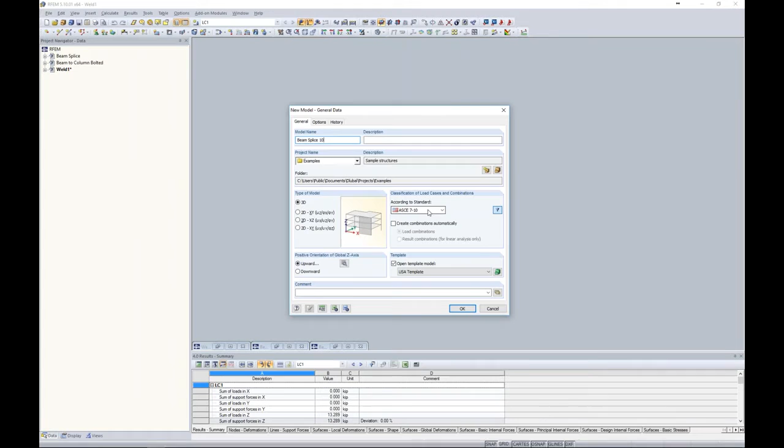So to begin with, we want to start off with a beam splice connection. And so I'm going to title this model Beam Splice 10. The type of model is 3D, and we can generate load combinations automatically here according to a specific standard. We're not so concerned with the load combinations and design today, so I'm just going to manually create a load case, and we'll just keep that pretty simplified. Once we click OK, then we can launch our new file, and up pops in the center here our graphic window.

We also have our tables to work with down at the bottom. What's nice about this is that you can import and export directly to and from Microsoft Excel if you prefer to work with Excel spreadsheets. We do have our tools to work with up here at the top. We will certainly be utilizing those today. And over on the left-hand side, we have our project navigator, which I think is a little bit more unique to our program. For example, the data tab, which we're currently looking at, this will provide us with all of our input data. You can see our long list of add-on modules is listed here as well, which we won't be getting into today.

The display tab is going to control everything that we're viewing graphically within this window over here. This includes our results as well. So typically if you want to turn on or off something, or maybe you'd like to change the color when you're looking at the results or how it's viewed, everything will be done within this display tab. Our views tab is where we can create user-defined views. And as we begin to generate this model, we'll also have some views that are generated by the program automatically as well. And finally, once we run an analysis, we will have a results tab available here.

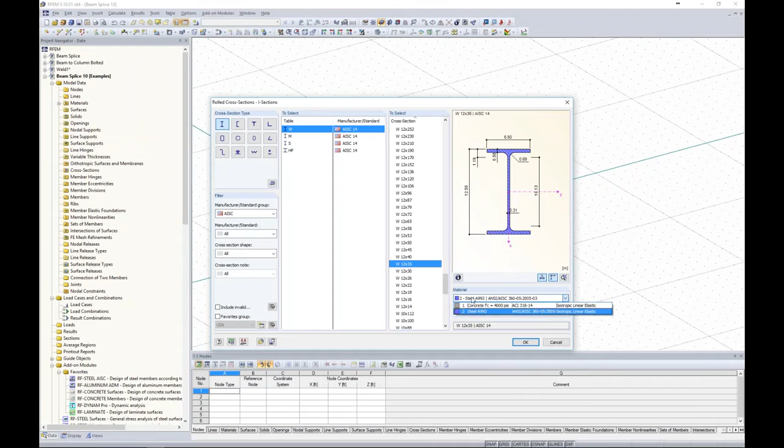So to begin with, we want to start off with a typical beam member for the first part of our splice connection. So I'm going to draw in a new member, and I will open up my cross-section database here. We have our rolled cross-sections. Once I launch this, I will see my AISC shapes listed here. I'm going to scroll down to utilize a W12x35. Now, steel A992 is one of the default materials within the program whenever we first create a new model, so we will just stick with this for now.

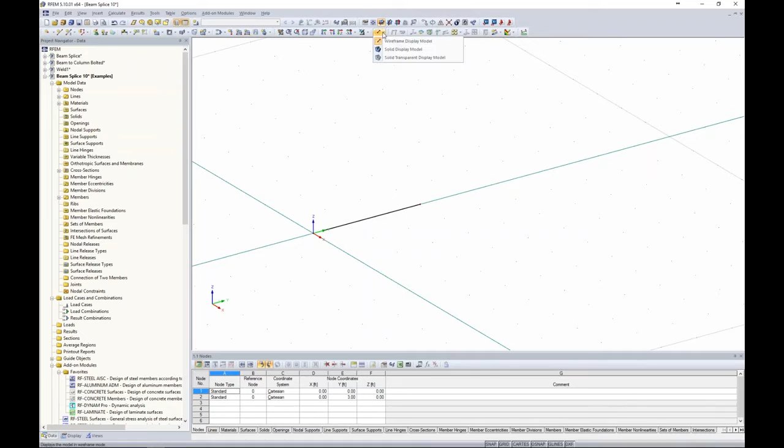And simply clicking on 2 points, one at 0, 0, 0, the other one at 0, 3, 0, we've created just a short beam segment here. Now, when I turn this into wireframe view, the thing to note is that members are 1D elements. So when we're taking a look at the wireframe view, it's just simply modeled by the center line. If we turn this back into a rendered view, of course, all of these cross-sectional properties will be taken into account for the analysis and design.

But if we're interested in something like the stresses on the flange versus the stresses on the web, you really can't view those different stresses on different components of the beam because it is being modeled by this simple center line here. Now, what we can do though is to right click on this member and we can utilize this option, generate surfaces from member.

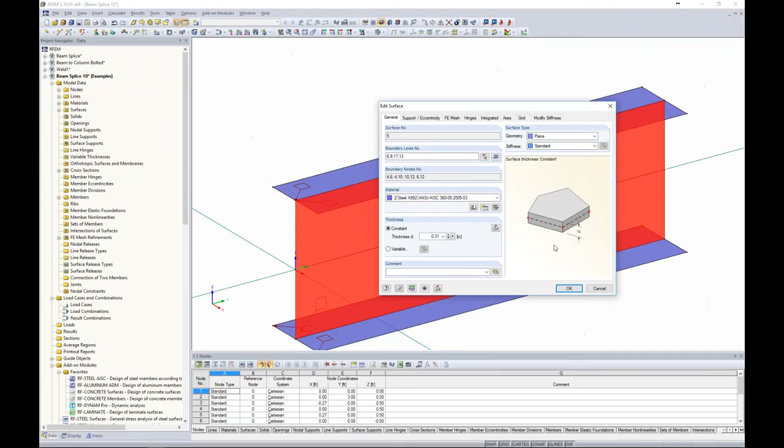So what I've done here is I've converted that 1D member element into 2D surface element. So we have a surface element now for our upper flange. We have a surface element for our web and even the lower flange. When I double click on the web here, you'll notice that steel A992 is still populated, and even the thicknesses are taken directly from that W12x35. So this is a very useful feature when we want to generate surface elements from those 1D member elements.

Now, the next thing to focus on would be our plate that maybe we're welding this W shape directly to. So I'm going to change around my drawing grid here, and we will snap to the front of the beam to change our origin, and we'll also change the plane here. Now, when I look at my drawing grid, the snap points are set at every foot. That's just default. So down at the bottom of the screen, when I right click on grid to edit it, you'll notice here that those grid point spacings are set at every 1 foot, as I just mentioned.

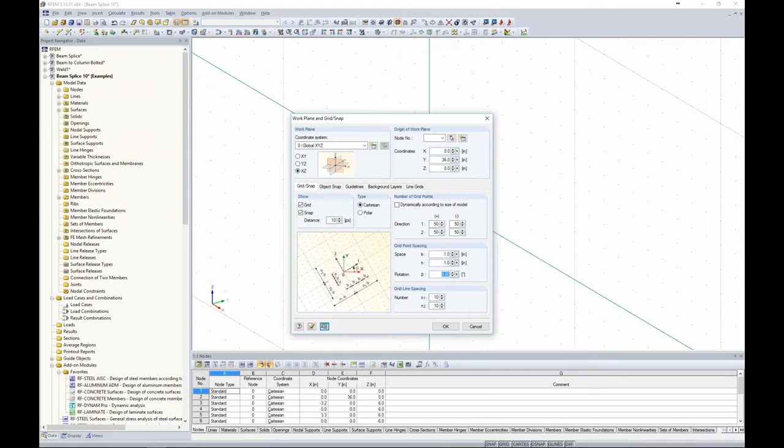We can open up our units options and automatically change this to inches instead. So now you can see that instead of 1 foot, I'm seeing 12 inches, and let's decrease this to every 1 inch. I click OK. So now you can see my drawing grid is much more useful when we're working on a much smaller scale, such as a connection. I'm going to orient the model here. So now we're looking at our W shape within the page, and we want to draw our plate element.

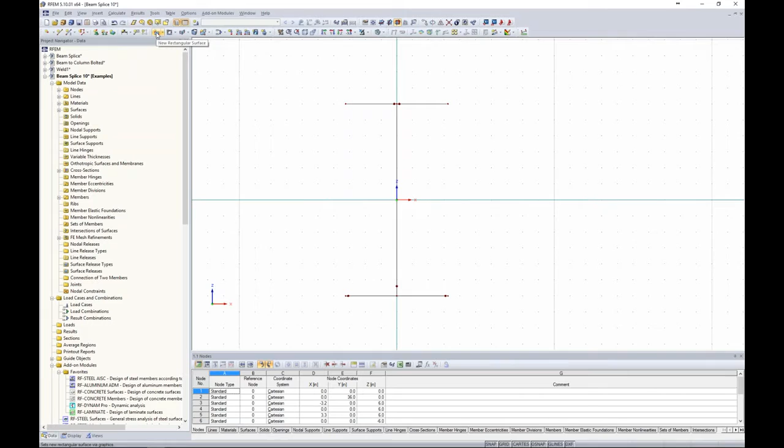I'm going to utilize this option, a new rectangular surface. So when I click this option, again, this is a surface element, just like what we saw when we converted our 1D element into our 2D surface elements. I want to create a new material here, and using my filters over on the left, I can filter to metal, to steel, to the ASTM, and you can see here we have our long list of ASTM materials. Now I can also utilize a favorites group. Favorites group is just where maybe I place a few of these materials, for example, what I'm using in today's webinar, that I can quickly have access to without having to sift through that long list.

So steel A36 will be the material we select here, which the material properties are populated down here at the bottom so that we can view those. The thickness, we'll set this as 0.25 inches. I click OK. So all I'm doing is just snapping from one corner to the other. And I turn this into an isolated view, just a surface element.

So the next thing that we would like to do is to place those openings for bolts. Up next to these surfaces, we also have the option for openings within surfaces. And you can see here we don't have just typical shapes like a rectangle, but we also have circles, parallelograms. You can even draw in your own polygon. So this is very efficient when you have some type of odd opening within a surface connection. It's really no problem to model that. For us, we will stick with a circular element though.

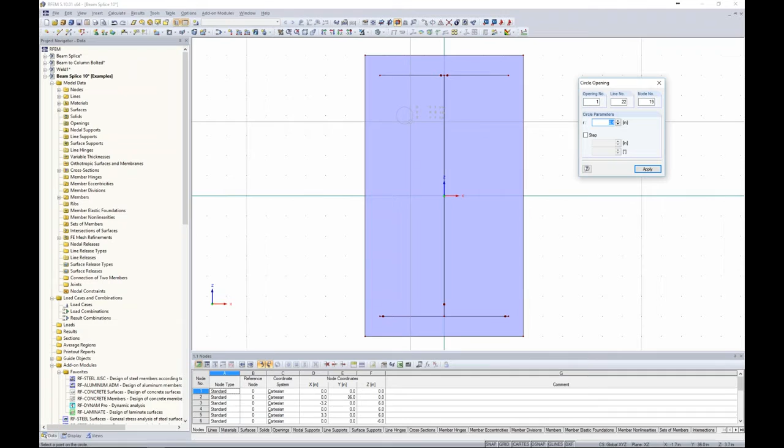So we just simply snap to the center line of that opening. And we can either snap to the radius of where we'd like to place that opening or type in 0.28 inches and click enter. So now that opening was automatically created within that plate element. So I'd like to do the same thing at the bottom here, and I just snap to the center point, type in 0.28 inches, and I have the two openings on the left-hand side.

Now, zooming in here to this opening, realistically, we're going to draw a plate right next to this one with an additional beam. This is a beam splice. And in order to hold the plates together, I want to draw some bolt members that are going to hold together those plates when they're in tension.

Now, those bolt members we'll get into in just a minute, but what they're going to do is to frame into right in the center of these openings. Now, they're 1D member elements, so the question is, how do we connect those 1D member bolts right here in the center to the rest of our plate surface? Well, the answer to that would be small little rigid links.

So what I can do is to right-click on this line, and I can create a node on the line and intermediate nodes. Maybe I select 3 here, I click OK. So now I have 4 nodes located along the line of this opening.

I go to draw in a new beam member, and this time the member type will be rigid. You'll notice that the cross section is automatically grayed out. That's because for a rigid link, the stiffness is set to an infinitely high number, a very, very high number. So the cross section is really irrelevant here. It's really treated as a coupling member.

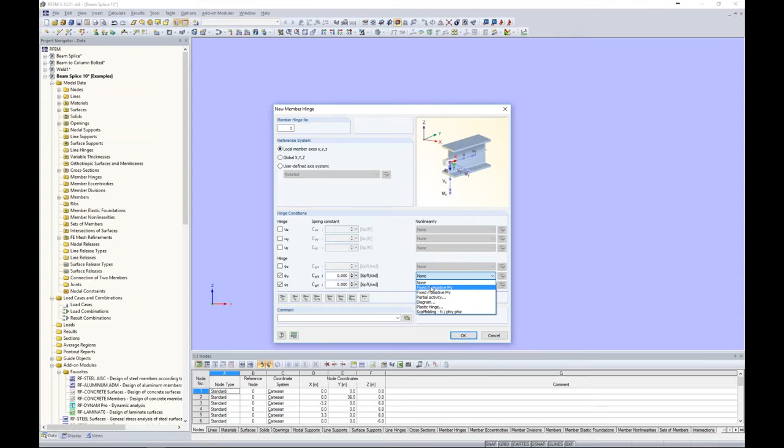And lastly, if you would like to get into nonlinearities for any of our 1D member elements, you can do so. So if we didn't have a full transfer of a moment, but maybe we had only moment transfer up until a certain value, well, you can set all of that with these options here. For our case, we will leave this as fully fixed.

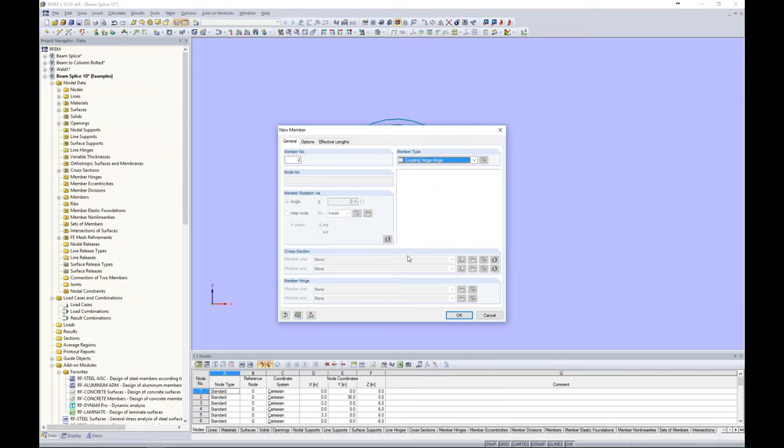Now, something else to point out is that we have quite a few other members down here called couplings. You'll notice that we have coupling rigid rigid, coupling rigid hinge. Well, when I select one of these, my member hinges are now grayed out. And that's just because these are some quick access tools to get to a rigid link with those member ends already defined. So for example, a hinge would automatically release the moment at either side. So same process, just a little bit quicker so that we don't manually have to define these member ends.

Now, a rigid type with the member hinge set as none means that it's fully fixed, and we can simply snap to the center line of this opening to those 4 nodes that I created. Now, in reality, you would maybe want to create several more rigid links here, but for example today, just keeping it simplified, 4 will be plenty.

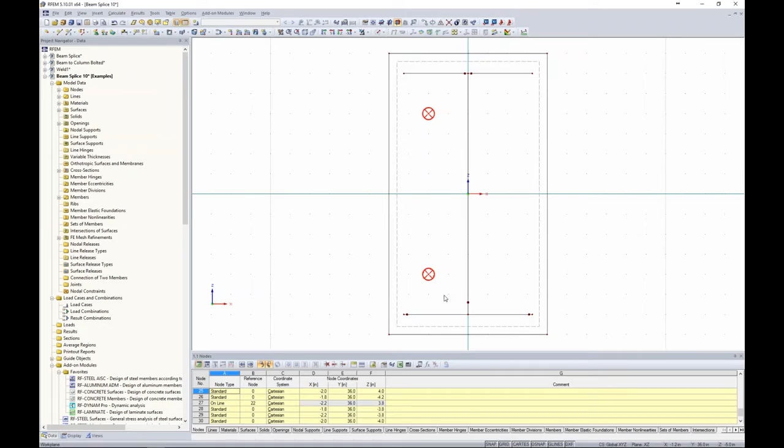So what we can do is to highlight those 4 rigid links, hold down our control button, and simply snap to our bottom opening to create the rigid links within the bottom there. So now that we're done with the 2 openings on the left, I can turn this into wireframe, select both of those openings, and once again, just making a quick copy, I hold down my control button and utilize the drag and drop feature to make the other 2 holes on the other side. And turning this back into wireframe or rendered view, we can see those openings there.

Okay, so moving on, we currently have our 1D plate or 2D plate element drawn here. What we'd like to do is to convert this into a contact solid. So the first thing that I would like to do is to right-click on this member, and we have this option to extrude the 2D surface into a 3D solid.

So here I can type in the height of the solid. Now this is important. If I have a 0.25 inch thick plate on the left-hand side and a 0.25 inch thick plate on the right-hand side, the height of my solid needs to be the sum of those 2 thicknesses. So in our case, this would be 0.5. Now in turn, if you had a 1/4 inch thick plate and a 1/2 inch thick plate, well then that would be 0.75. So you just want to add those 2 together to come up with the total height when we're looking at something like a contact solid.

The other thing to notice is that we do have the surface type selected here where the extruded surfaces will be set to null. So once I hit apply, let's take a look at what the program has done here.

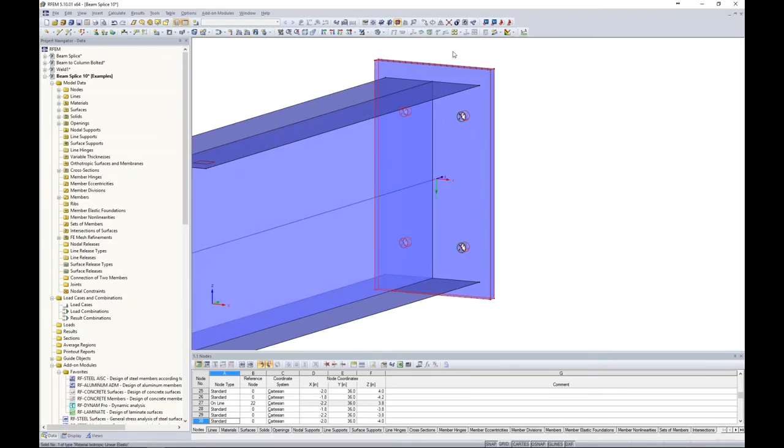It's created a solid element, so now we have a 3D element rather than a 2D element. We can see that those openings were carried through. That's all great, but when I'm looking at my surface elements, the solid is comprised of surface elements on every end.

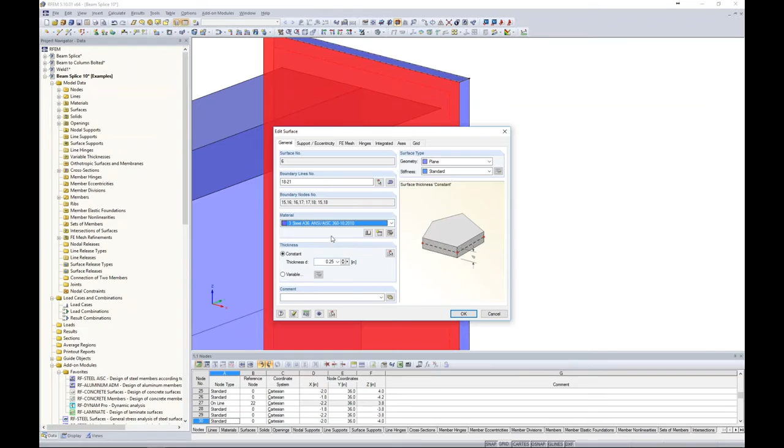And that plate that we just defined, if I double click on it, it was automatically set to null. So that's what that checkbox did when we extruded this into a solid. So we want to change this back to standard, and we've already defined steel A36 within the model. The thickness is remembered at 0.25, so I click OK.

Now the exact same process needs to be done on the back side of this solid. So selecting my back surface element here, we're going to change the stiffness to standard. Steel A36, 0.25, that's great.

But you'll notice that at the top, these narrow sides, I still have my surface elements here defined as null. So around these smaller edges, we're going to keep all of those with 0 stiffness.

So we currently take a look at this solid, and it's indicated - if we turn this into wireframe, it's probably a little bit easier to see - by this purple node right here in the middle. We can double click on it, and you'll see here the solid type is set to material. So this just means it's a typical 3D element within our finite element software.

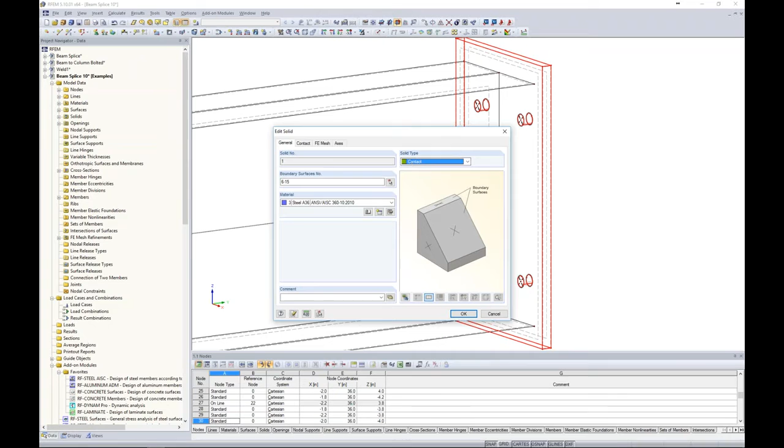What we would like to change this to is a contact solid. So we just utilize this drop-down box, and now we have a contact tab here. So I want to jump back to the PowerPoint to discuss a few recommendations and requirements for contact solids.

Now, this plays absolutely no influence in terms of the stiffness of our contact solid or anything of the sort. Lines and nodes are just simply meant to be used as modeling tools for surfaces, solid elements, and even members. What the program is doing internally is creating FE mesh elements in between those integrated objects. So to be clear to the program, we do need to have those same integrated objects on the top and the bottom.

So going back to RFEM then, what does this mean for us? Well, if we take a look back into the model, you'll notice that we have these line elements here, which are shown from framing our surface elements from our W shape. Maybe I want to take a look at here of just the plate elements, and we'll make a visibility here just based on these selected objects.

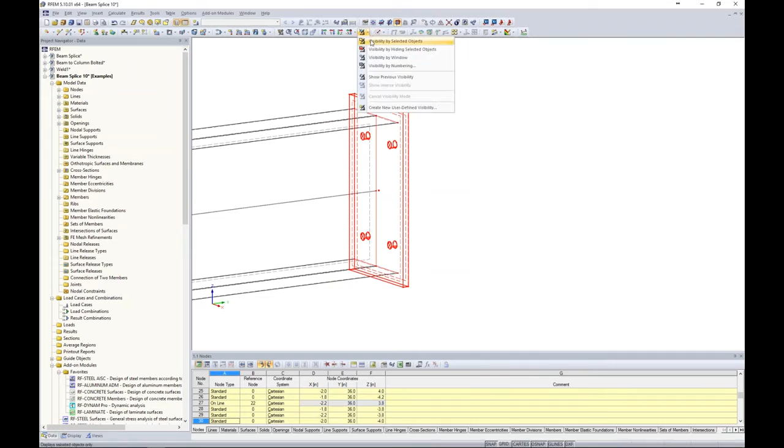So what I need to do is I actually need to copy these same exact elements to the back side of my surface. So I can do so by selecting them here, by highlighting, and I can hold down my control key. I even need to make a copy of that center node right there.

So taking all of these elements, then I can rotate this around, use my Move Copy tool, and I can make one copy in the global Y direction of 0.5 inches, and I click OK. So now you can see those lines and nodes are identical on each surface.

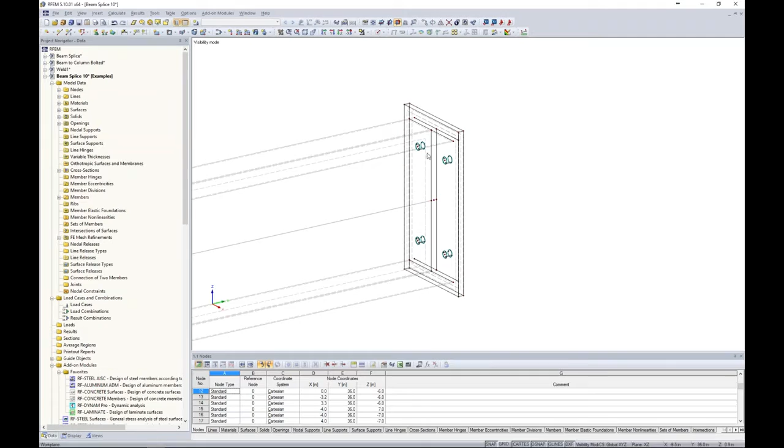This has to do with the fact that these surface elements are out here for my beam, but if we didn't have a completely symmetric connection here, this is what you would need to do, otherwise you'll get an error. In contrast, we're going to make a copy of this beam from the left-hand side to the right-hand side. So we can select all of these elements and utilize our mirror tool.

Our mirror tool is exactly like what you'd see in AutoCAD. We'll create one copy, mirror it about the global XZ axis, and graphically choose a point here in the center of our plate to mirror that. We click OK, and now you can see those lines, nodes, and everything were automatically generated when we mirrored our entire beam section to the other side.

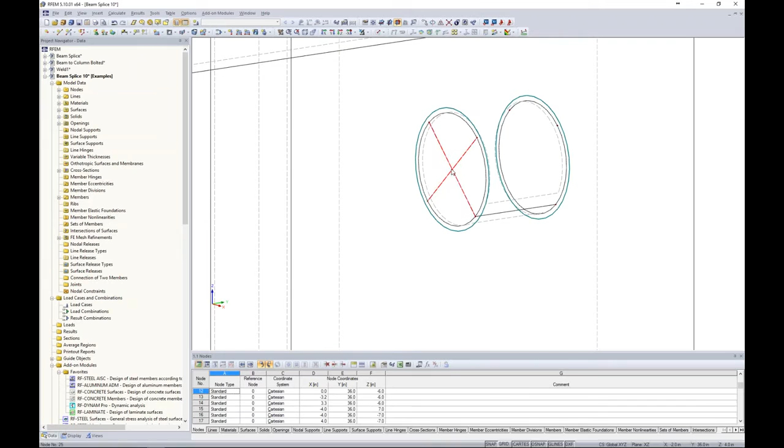A couple other things to note: if we zoom in, it looks like our rigid links were not copied over when we extruded this into a surface. That's no problem - all we need to do is highlight those, hold down control, and snap to the other side. We'll do so with our opening on the right-hand side. And for the bottom, you can select both rigid links on the left-hand side, hold control, select on the right-hand side, and drag and drop to do both holes at once.

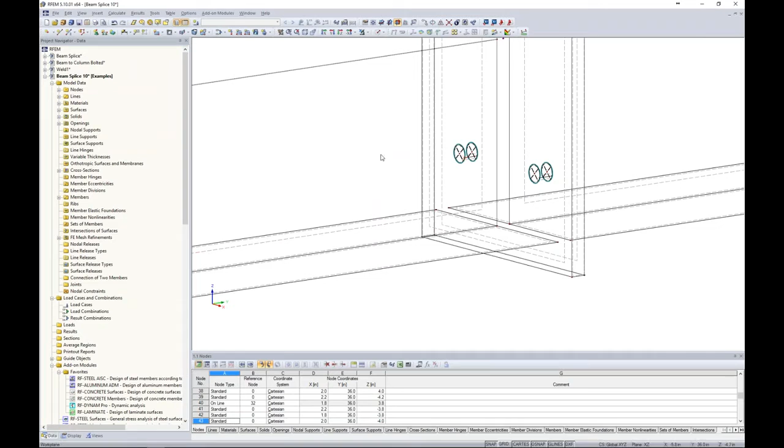So we had those rigid links drawn, but we've done nothing yet to model our bolts. This is where we're going to go back into our member database and select a typical beam type member for our bolts.

I want to create a new cross section by going into my cross section library, and under my thin walled sections, I have the option for a round bar. With a round bar, all I want to do is define a diameter of 0.5 inches, representative of my bolt diameter.

I do want to create a new material. Utilizing my favorites group again, I have added steel A325 to my material database. This was a user-defined material where I've adjusted my properties to match steel A325 directly from the AISC or the ASTM. I click OK.

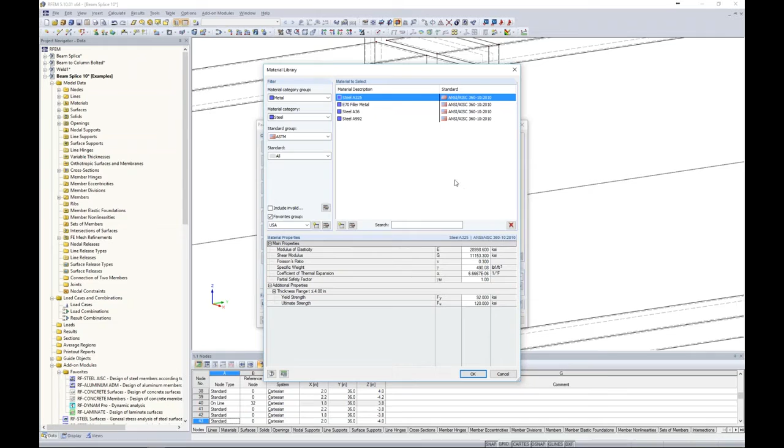I click OK again. Now the member hinge, I'm going to leave these as fully fixed. I'm going to assume that the bolts and the nuts are tightened such that I'll get some moment transfer between those bolts holding the two plates together.

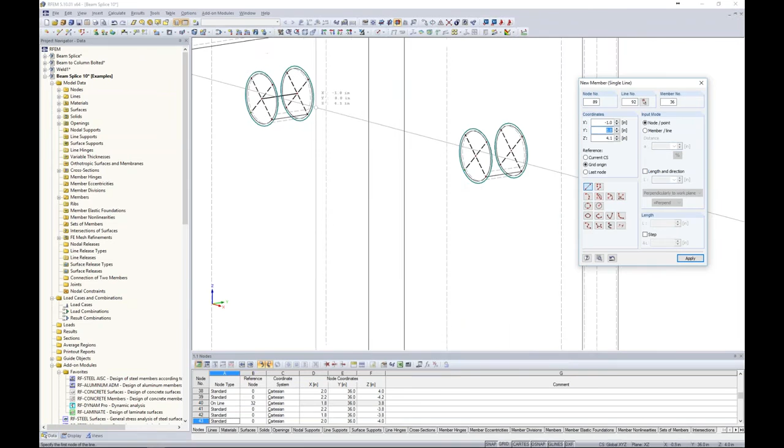And I click OK. Now all I need to do is snap to the center points here between my rigid links. So hopefully it's a little more clear why we created those rigid links in the first place - in order to tie these bolts back into our surface elements.

Once I'm done with this, I can right click to exit that dialog box, and let's take a look at the rendered view. Now with our openings, those are still shown here, but the rendered view of our bolts shows that circular short member representing the bolt members.

Now that we've pretty much modeled all of the geometry, the next thing we want to do is discuss the behavior of our contact solid. Double clicking here back to our solid, remember that under general we specified the solid type as contact, so now we have a contact tab available here.

The program automatically determined what surface A and surface B should be - these are our quarter inch thick A36 plates. Sometimes you may have to come in here and manually define this, just depending on the modeling steps you take, but most of the time the program is smart enough to recognize what surface A and surface B are.

The next two entries define the behavior between these two surfaces. The first is contact perpendicular to the surfaces, and for this we have three options. The first is full force transmission, where all of our normal forces and stresses are fully transmitted between surface A and surface B. The second option is failure under compression.

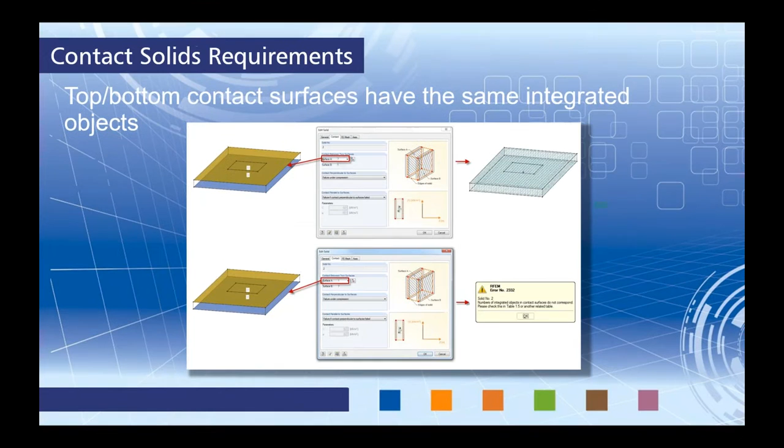Moving on to contact parallel to surfaces. So this has to do with our shear forces. And for this, you'll notice that we have quite a few more options here. So I'm going to jump back to the PowerPoint and we'll move on to the next slide where I want to explain these 7 options in a little bit more detail.

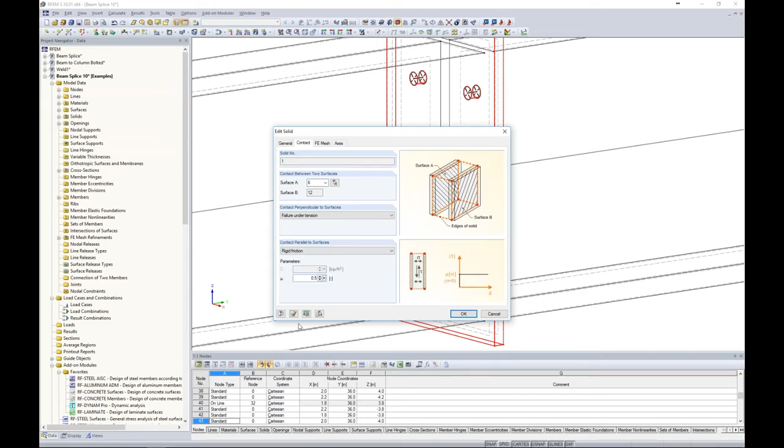So going back to the model then, when we take a look at our particular model today, we have failure under tension. And as I mentioned, we will choose rigid friction here. And to emulate these two steel plates sliding against one another, we can use something like a friction coefficient of 0.5, and I click OK. So now we have fully defined the behavior between these two plates on the left and right hand side with a contact solid. So a few other considerations, of course, before we're able to run an analysis.

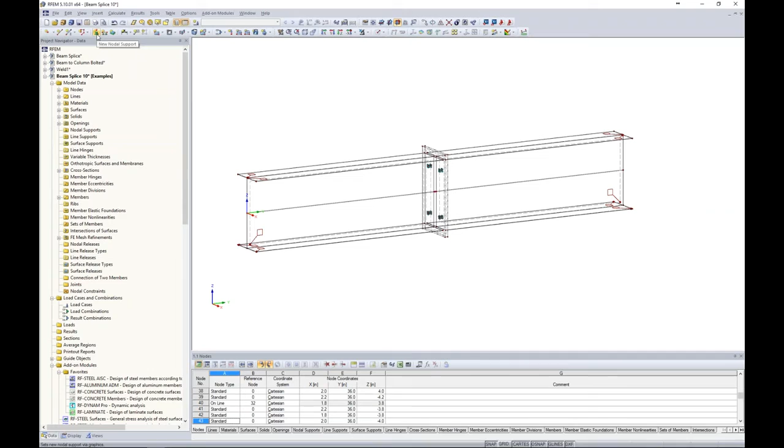The first one is we need to support the model. We have nothing here such as a nodal or line support. So for this, you can see our support options shown up here in our tools: nodal support, line support, and surface support. If we open up the line support and we create a new definition, this should look familiar. It looks just like what we saw at our member ends. We have our 6 degrees of freedom, translation and rotation, where we can fully release these or fully fix them. We have spring constants here for partial fixity, and again, we can get into nonlinearities.

This also allows us to define things like slotted joints. Maybe we want this beam to slide up until a certain force and then it will be fully fixed. So all of those options are possible with the nonlinearities. Now today, we are going to stick with a simple hinged application. So I can simply draw a selection box over the left and right hand side of this beam member.

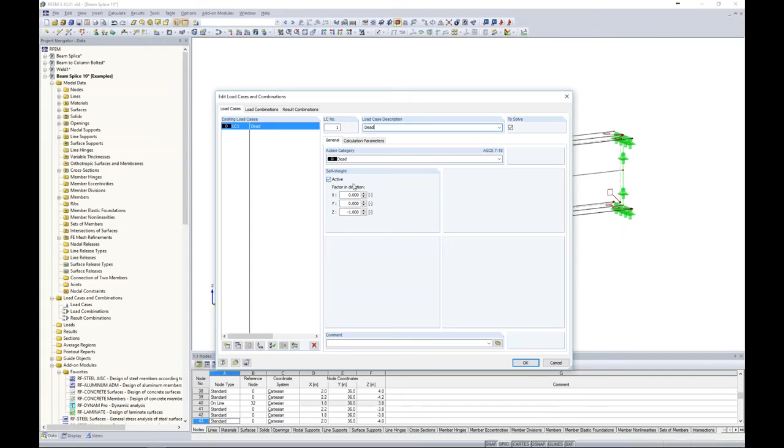The next thing to do would be to load the structure. So with this, I'm going to go up to my new load case. And like I said, we're going to keep this fairly simple for today, only defining one dead load case. I will leave the self-weight activated, so it will automatically be taken into account with this particular load case.

I click OK. Now, the next thing we'd like to do is apply a line load across one of these members. Now, intuitively, we would think, okay, well, let's apply a member load. But remember, we don't have any 1D member elements within this model anymore. We've converted everything to surface or solid elements. So line elements for surfaces or solids must utilize this new line load.

So with a line load, we simply specify the load direction in the global ZL direction and give it a magnitude of -50 kips per foot. I click OK, and then I can click to the top of that beam member over here on my left. Now, I think it's perfectly acceptable to maybe not have symmetric loading for this particular connection, but to really see when we have unbalanced loading. So I'm just going to apply my load to my left-hand side and leave the right-hand side without any load except for self-weight.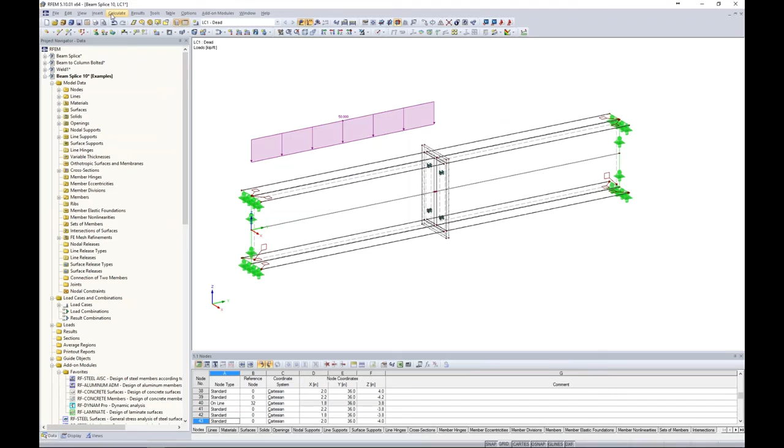The final thing to look at would be our FE mesh. So under calculate FE mesh settings, the global FE mesh is always set to 12 inches or 1 foot. Now, the program was smart enough that when we converted these 1D member elements into 2D surface elements, we are at a much smaller scale now. So it automatically recognized that 12 inches was entirely too big for this FE mesh for these particular elements. So that's why it applied these little symbols over here. These symbols just mean FE mesh refinements.

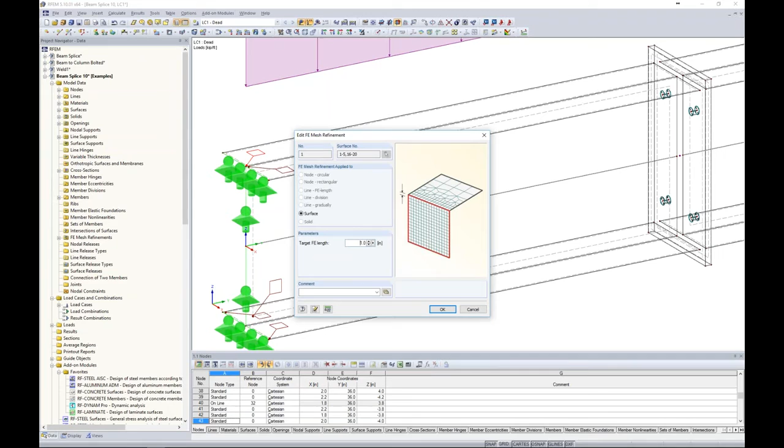And if I take a look by editing what the program automatically put in here, you can place FE mesh refinements about a particular node, a line, a surface, or a solid. Now we're applying this directly to the surface here, and the program automatically decided that 1 inch would be much more reasonable than 12 inches. So if we take a look by going to calculate generate FE mesh, we can see that the program automatically created the FE mesh even at our plate elements where it's required to be much smaller than 1 inch. Everything is done automatically. It's tied to the nodes, the lines, the members. Everything is done for us.

But what I do want to show you is that our FE mesh refinements are listed here under our data tab in our project navigator. So if I were to take that FE mesh refinement that I just showed you and completely delete it by just hitting the delete on the keyboard, and let's say that we didn't know any better but just to leave the FE mesh settings set at this global mesh. So it's currently set to 12 inches. Choosing this option here to regenerate the FE mesh, once I click OK, we can take a look, and I think that we should all be in agreement that this is a terrible FE mesh. This simply will not provide you with your correct results because the FE mesh is entirely too big.

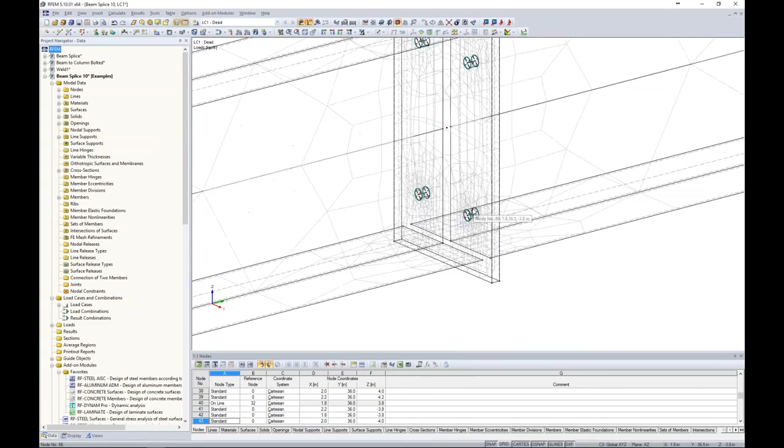Now the program does a little bit of a better job within the contact solid, just because we have elements that are much closer than 12 inches that it needs to tie it together to, but out here you can see that it's entirely too big. So rather what we can do is under calculate FE mesh settings, we can change the global FE mesh settings to something more like 1 inch. I click OK, the FE mesh is generated and everything looks much cleaner.

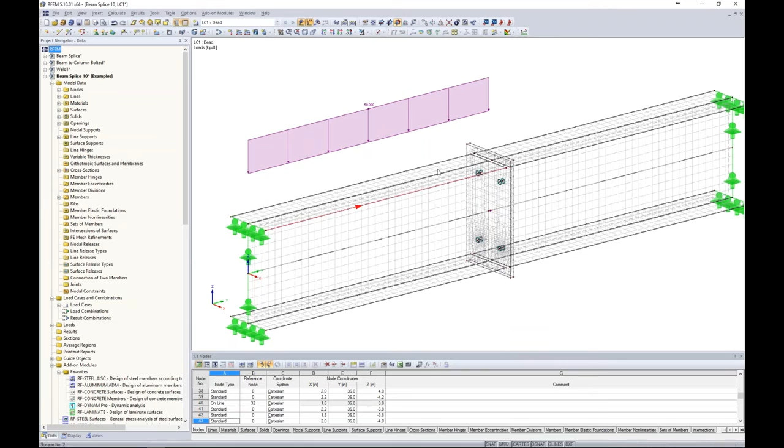Now there is an iterative process with this. You can continue decreasing your FE mesh size smaller and smaller and smaller, and sure, your results are only going to be more accurate. But at some certain time, you're going to be increasing your solution time to be very high in comparison to how much your results are actually changing. So get a better feel for this as you begin to model in finite element software more and more.

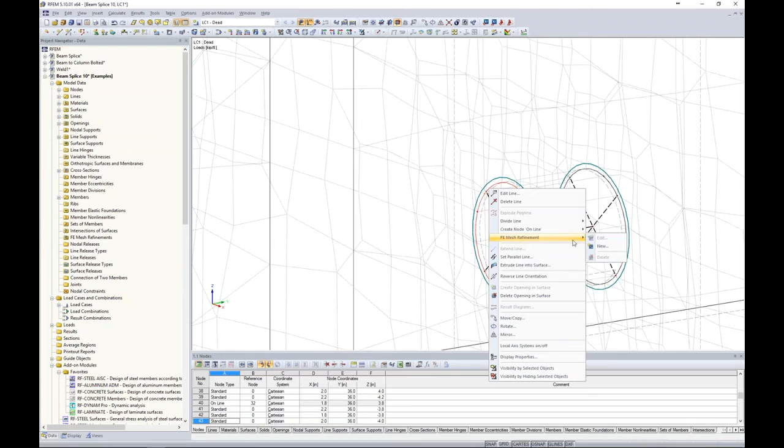The other thing I wanted to point out quickly is just another FE mesh refinement. So if we're zooming in here to one of our openings and we determine, okay, we'd like to have a little bit of a finer mesh than what's shown here, we can always right click on any one of these elements, and here's where you'll see the option for FE mesh refinement. We can choose new. We want to create a new definition type, and now you can see my FE mesh refinement is shown for lines.

So maybe my target FE length would be something like 0.1 inches, and I'd like to have 4 layers, and it will transition back into the global 1 inch setting. I click OK, I click OK. Now the FE mesh was cleared, and I can see my FE mesh refinement symbol, which is noted by these nodes across my line.

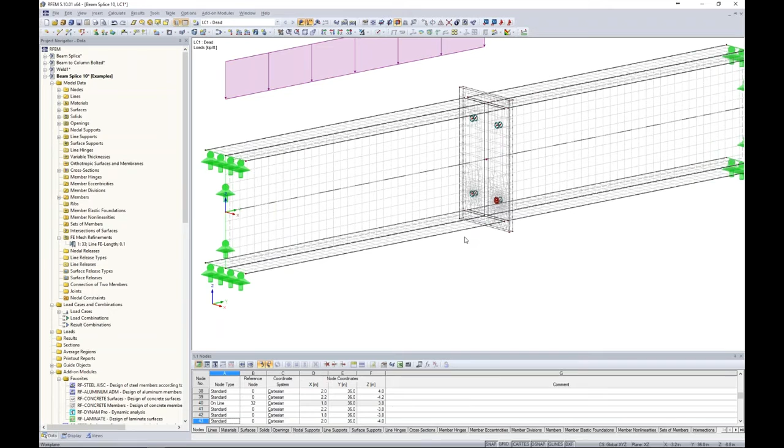Going to calculate, generate FE mesh, then we can see here we have a much finer mesh on the right-hand side than maybe what we're seeing over here on the left-hand side. So just some different options in terms of FE mesh refinements to really focus in on a particular area within the model rather than changing our global settings to something much too small, which really increases our solution time.

Okay, with that said, I think we are finally ready to run our analysis. So what the program is going to do now is to cycle through this load case. So we've only applied just this dead load. Now, a couple other things to keep in mind here. This is a nonlinear analysis. So what the program is going to do internally is create these FE elements. And actually, it's taking quite a bit of a long time. It's usually not this long.

And keep in mind too, we can see down here what the program's doing. It said verifying authorization, so it's checking my license. It is a nonlinear analysis program, so the contact solid is something that's going to increase our solution time as well, and that's just because of that different behavior that we defined between the two plates. So that analysis is ran, and we are automatically brought into our results tab here, which is available within our project navigator that I mentioned at the beginning of the webinar.

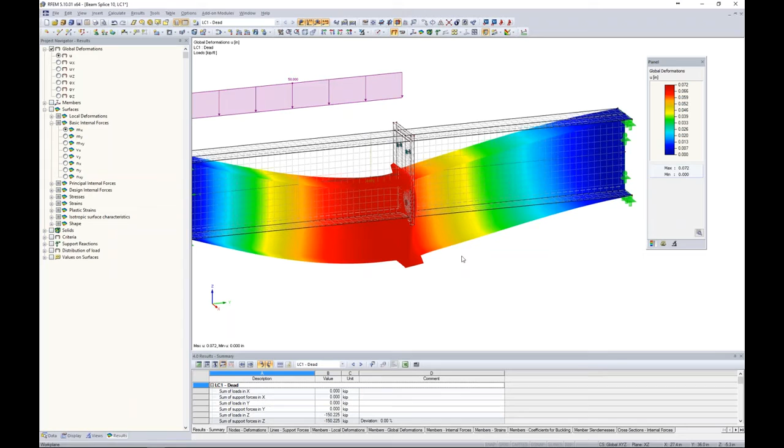So to me, I think the most important thing to automatically take a look at is deflections. Deflections are really going to show us if we've correctly defined our contact solids, maybe our FE mesh, and if it looks to about what we would approximate. So it's kind of a little bit difficult here to see our deformations and what's going on. So under our display tab, like I mentioned before, we have this whole results tree. And under deformation, I can actually choose this option to outline my deformed surfaces. So now it's a little bit more clear on what's going on with our beam elements, our plate elements, even our openings are shown.

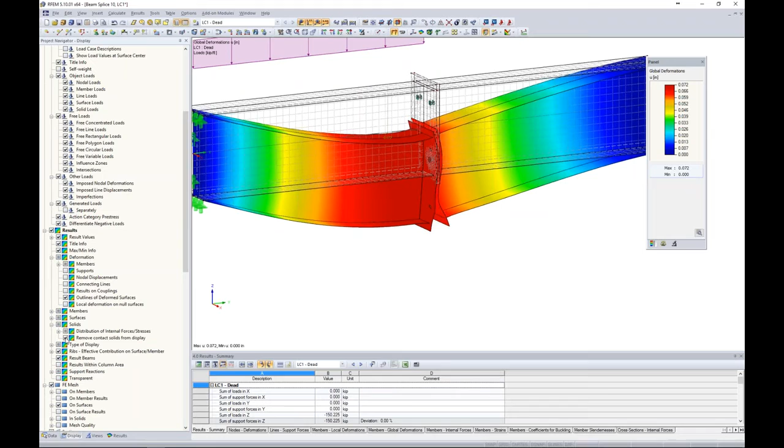The other thing to take note of is that under our solids tree, we have a feature here called remove contact solids from display. So when I activate this, my contact solid is no longer shown, and I can see truly what the behavior is between those two plate elements. And just as we defined, when we have tension, it looks like the contact between those two surfaces is failing. But as we move up the length of those plates where we have compression, those two plates are acting together. You can even see our bolt elements indicated by these lines here. They're pretty much keeping the plates together in terms of those tension forces.

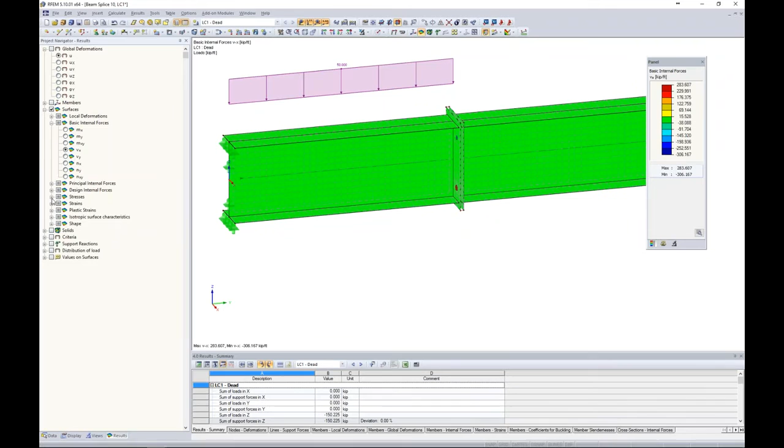What we're also probably interested in under the results are our surfaces, and we can view internal forces here such as our contour lines, but maybe we'd like to take a look at our stresses. So when we take a look at von Mises stresses, and there's a whole lot of blue going on here, what I'm going to do is make a selection of just my plate element here, visibility by selected objects. And the first thing I want to take note of when we're looking at stresses, especially on a small scale like that, is to jump back to our display tab. And we actually want to change one of the settings here. So under surfaces is the distribution of internal forces and stresses. I'm going to change this to constant on elements.

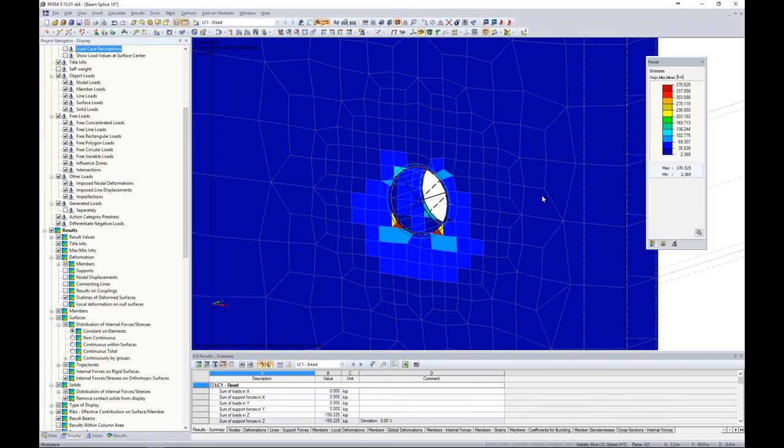So now when I zoom in, each FE element has its own average value. What was happening before is the program was trying to use a smoothing algorithm to tie all of these together, and you're going to get maybe less than accurate results in terms of our color panel here. The results are still accurate, but just how it's presented to you is much different than averaging it out over each FE element. We certainly have some very high stresses here, 370 KSI. I would attribute most of these to singularity issues. So again, maybe we would want to add in some more rigid links. There's ways to smooth out these singularity issues.

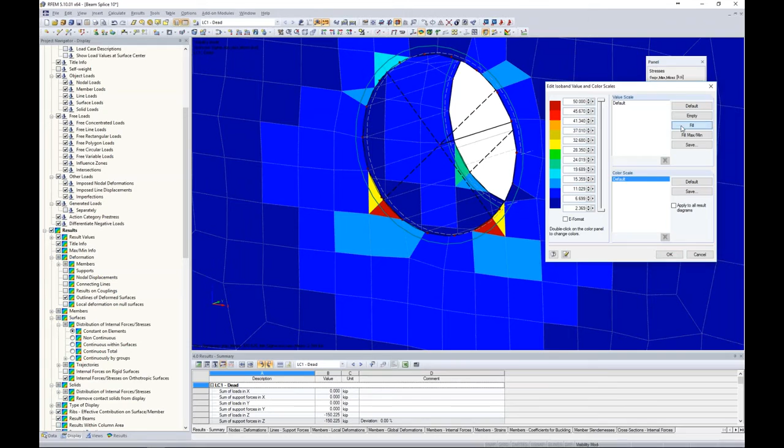But if we're more so interested in the results without these very, very high stresses at these single FE elements, what I can do is to double click on my color panel here. And maybe I change my upper limit to something more like 50 KSI. I can choose the fill button. Then I click OK, and now I'm seeing my results that are maybe a little bit more useful on what's going on with my plate elements. So we certainly still have very high stresses. 50 KSI is over the yield strength of our steel A36 KSI plate.

So maybe this is where we size up our plate. Maybe this is where we move on to a plastic analysis with nonlinear materials.

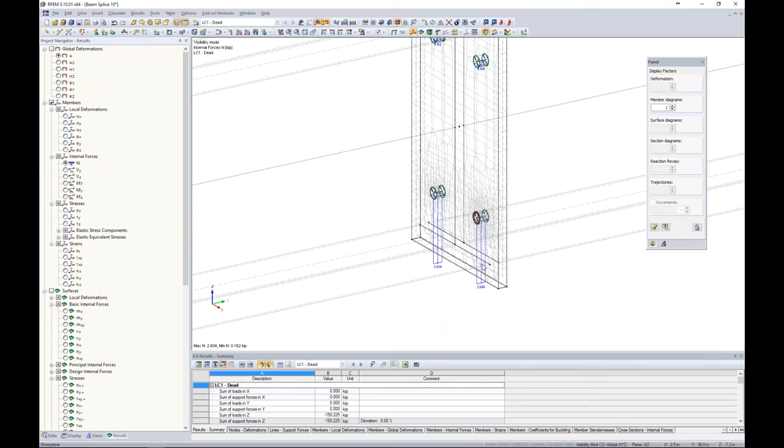We can also take a look at shear forces, and we can zoom in here, and if we right click on any one of these members, we can take a look at the results diagram to get a little bit more information in terms of the magnitude along the length of these small little bolt elements. So again, if we're designing this connection and we want to see the forces on the bolts, that's all possible as well. So that really sums up the first example here in terms of a contact solid.

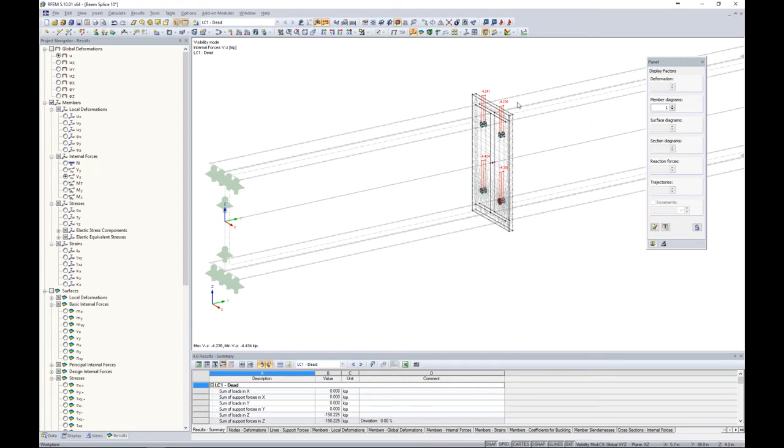Now, this was a completely symmetric design, which was very nice, but we all know that this typically is not the case. So what do we do when we don't have complete symmetry when we're looking at something like a contact solid? For this, I want to jump into my saved model here, and it's just a typical beam framing into a column. Now, I went about it the same way of converting 1D member elements from my beam and my column. I even went about it the same way for my contact solid for my plate element, but there's something that's slightly different here. Again, we don't have symmetry on the left and right-hand side of this plate anymore.

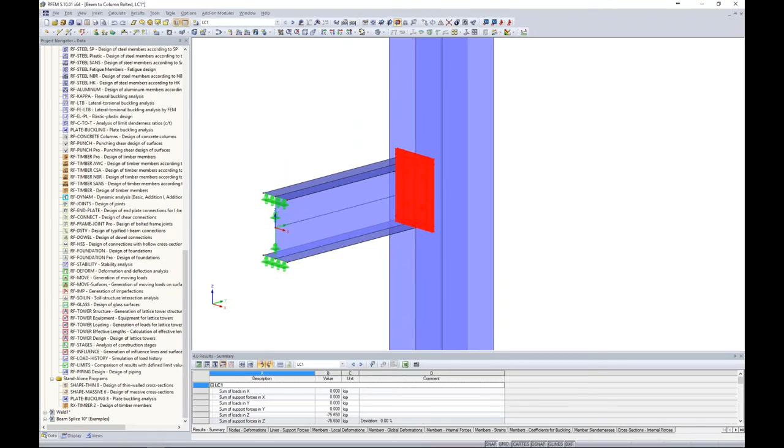So making a visibility view here based on my plate only, and maybe I turn this into wireframe, and we'll change around the viewpoint here. Here is my plate looking into the page of my beam. You'll notice that I have 4 contact solids defined at the top, 4 in the middle, and 4 at the bottom. And the reason for this is just simply because I didn't have so much symmetry like we did our last model, that I had to create these smaller contact solids in order to meet the requirements. The requirements being that each contact solid must be comprised of 4 different lines, as well as contact solids must have identical integrated objects on the surface A and surface B.

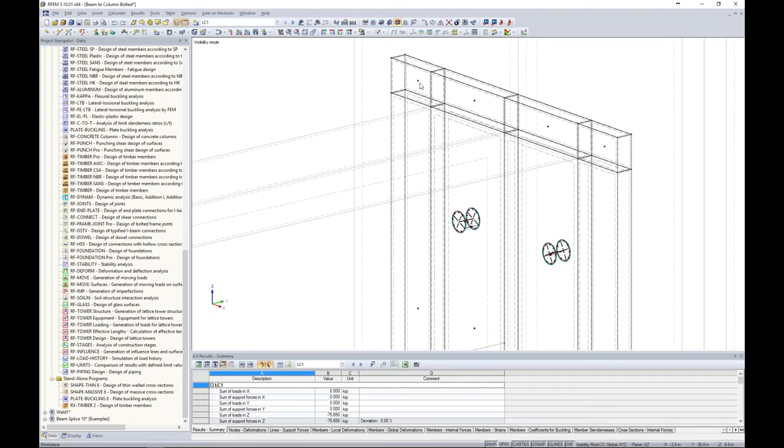But if I take a look at all these contact solids defined side by side, so you'll notice both of these are highlighted at the same time, we can set our behavior for them all at the same time. So again, I have failure under tension, perpendicular surfaces, and I have rigid friction defined for my behavior parallel to surfaces. So this is going to act like one continuous contact solid. Point being that when you have anything more complex, is to split it up into several more simpler contact solids.

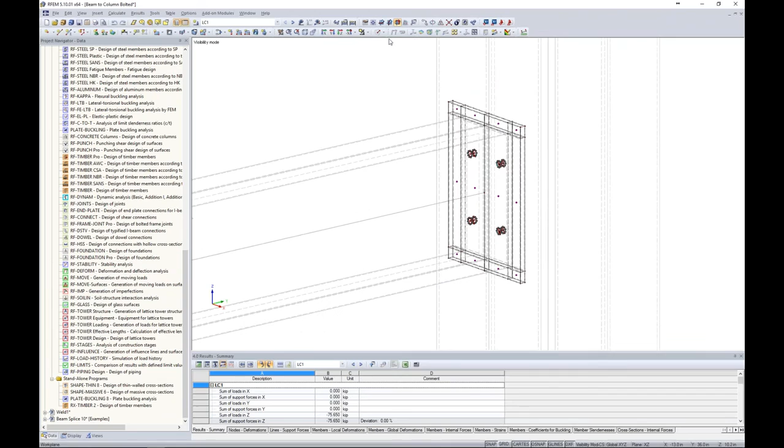So now when we take a look maybe at our results here, let me cancel out our visibility and turn on our results. I am immediately presented with my deflected shape here. So we place this line load, and I turn this into an elevation view, zoom in, and it's doing exactly what I would expect, where I have tension on this plate. It's pulling away from the column. As we move along the plate, places where there are compression forces, well, that's where we should see the full interaction between the 2 surface elements, or actually we have multiple surface elements for these contact solids now. Here are my bolts in tension, of course, as well. So same exact concept. The only thing that I did was split that contact solid into several simpler elements.

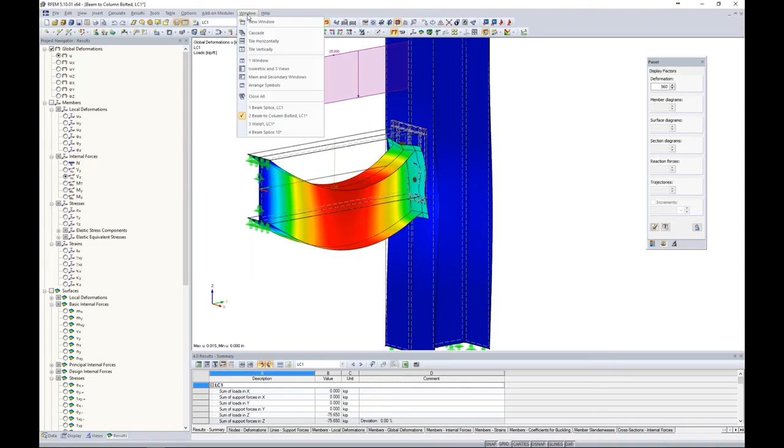Now, we often get asked too, how do we take a look at weld connections? You know, maybe you're interested in some type of odd connection, or maybe just strange forces being introduced into a connection. Well, we can also do that with finite element modeling as well. So jumping into another saved model here.

This would be completely independent of contact solids. So I didn't utilize any contact solids within this model, but let me explain what's going on. So of course, we have our W shape consisting of our typical surface elements that we've been through many times now. But you'll notice up here is my plate that my beam member is being framed into.

Well, when I take a look at this plate element, I no longer change this to a contact surface or contact solid. It's just a typical 3D solid with a material set within the depth of steel A36. So this is just a 3D element within our program RFEM. Now, all of those requirements for boundary lines, same integrated objects, those go out the window for a typical solid element. That's not required for typical solids, just only for contact solids.

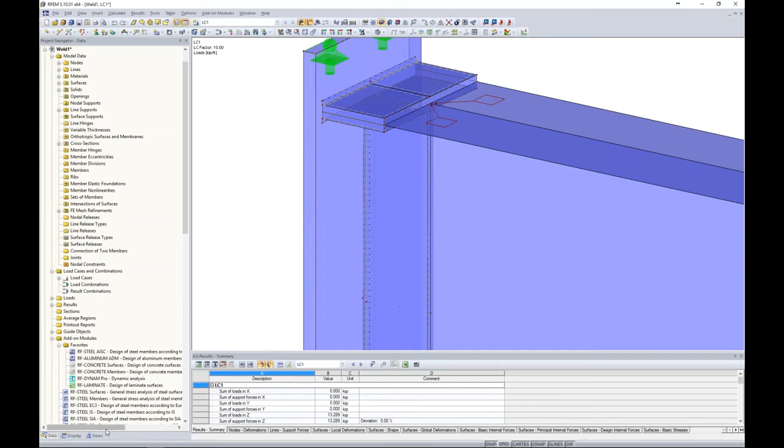So you'll notice we have many different lines and elements framing into the front side of the surface A, but we don't have it shown on the back side. So how about the welds? Well, I created a user-defined view here, and I can turn this on, of my weld solid. So zooming in here, you can actually see the triangular shape of this fillet weld, for example.

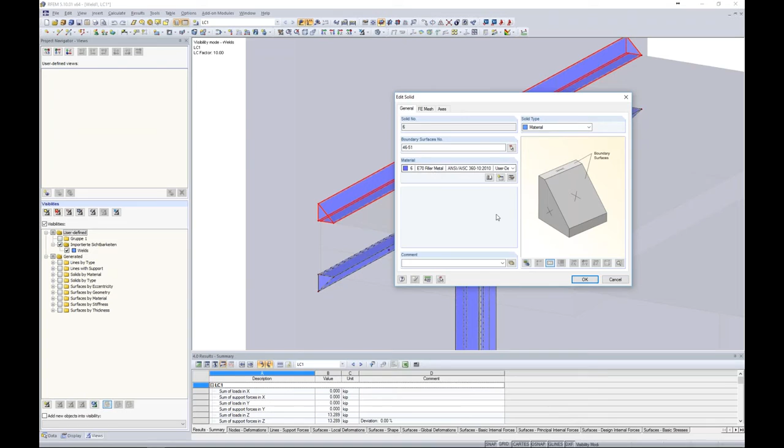Now, this weld is just another solid element. I double click on it. The solid type is set to material, just like what we saw with our plate, except I changed the material. I added in E70 filler metal to represent a higher strength metal for the weld here. So when we're looking at these solid elements for our weld, we have welds at the top of the flange, the bottom of the flange, and along the length of the web as well.

So the other thing to note, if we cancel this visibility, is that we have our 2D surface elements for our beam framing into there. But in order to accurately get our results for the stresses within this weld, you'll notice that I also converted the flange, the web, and the lower flange all to solid elements for this beam as well. So again, a solid type material, steel A992.

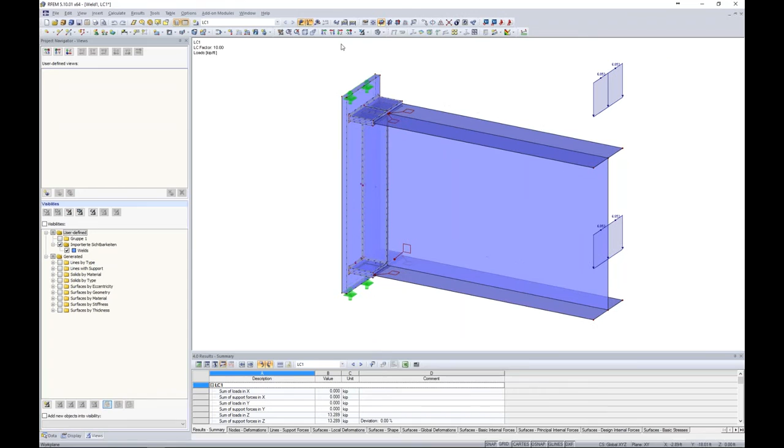Now, I didn't have to create a solid element for the entire length of the beam, just purely at this connection where I'm interested in my stresses. And that's because we have this solid weld. It must frame into the solid plate, which also must frame into the solid flange and web. So now when we've loaded the structure and we run a simple analysis, we'll get our results.

Now again, we can view our surfaces. For example, our von Mises stresses might be of interest to us, maybe not so much out here. But now, unlike contact solids, we also have these solids results available here. So before with contact solids, there was no way to view stresses because there really was no material for a contact solid. But now we just have a typical 3D element.

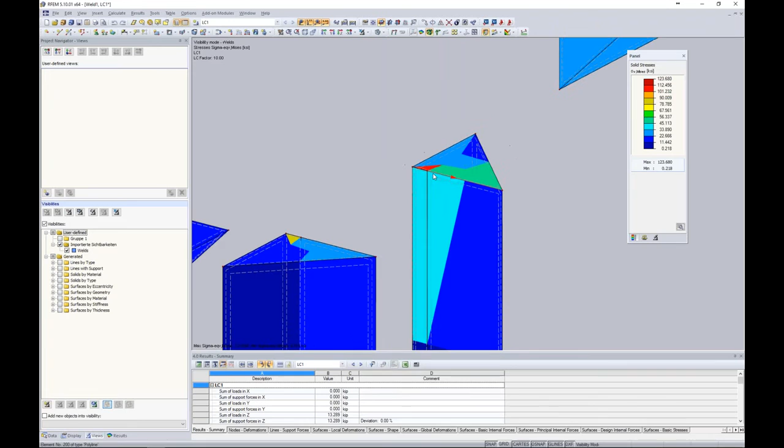So what I can do is go back to this view of my weld element, zoom in here, and currently I'm looking at my von Mises stresses, and I can see points where maybe I have a really high stress. For example, this looks like an area where maybe I want to reconsider this connection. Maybe I want to refine my FE mesh a little bit more. You can do so within this solid element for these welds as well.

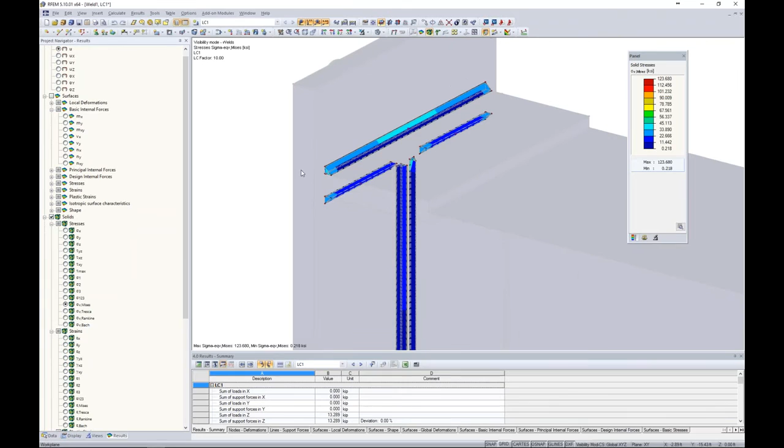But the point being that you can model the welds as typical solid elements, and then we can view all of these stresses within here as well, including strains and plastic strains if you wanted to get into that with nonlinear materials. So we can also take a look at our plate element. So let me cancel out of this visibility mode.

Maybe we select just our solid, create a visibility by selected objects, view our results again. Again, this is just von Mises stresses, and we can see the points of high stresses here, right where that weld is framing into the top of the flange and bottom flange. So just another approach for a welded connection, independent again of contact solids.

Okay, so moving on to our last example. I'm going to open up another model here, and this would be a simple tie rod type model. Again, we're on a very small scale here. And just for the sake of time, of course, I didn't have time to model all this, but I want to point out a few features of what's going on.

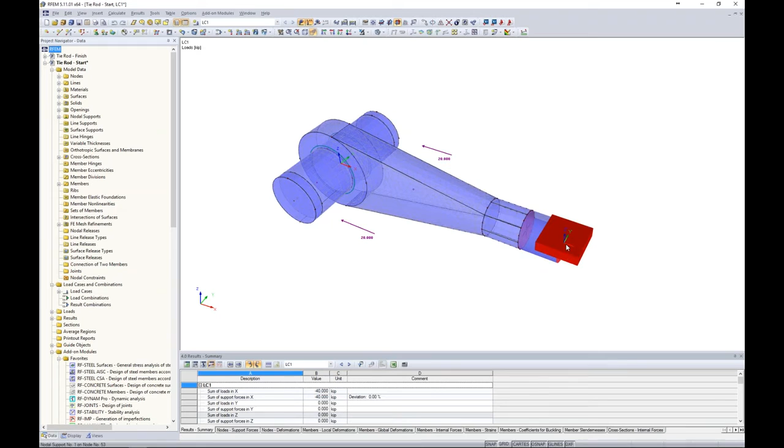So over on the right-hand side, we have a fully fixed nodal support over here. Now, for the most part, the rest of these elements are solid elements. So for example, if we take a look at the front part of our tie rod, I can double click on this. Just like what we saw before, we have the solid type set to material, steel A36. So again, those conditions of 4 boundary lines comprising a contact solid do not apply to typical 3D solid elements.

You really can have any shape that you would like for solid and surface elements. The bolt passing through the ring of this tie rod is also modeled with solid elements, and we even have our ring defined by an additional solid element. So what we're trying to emulate here is this bolt passing through the tie rod ring.

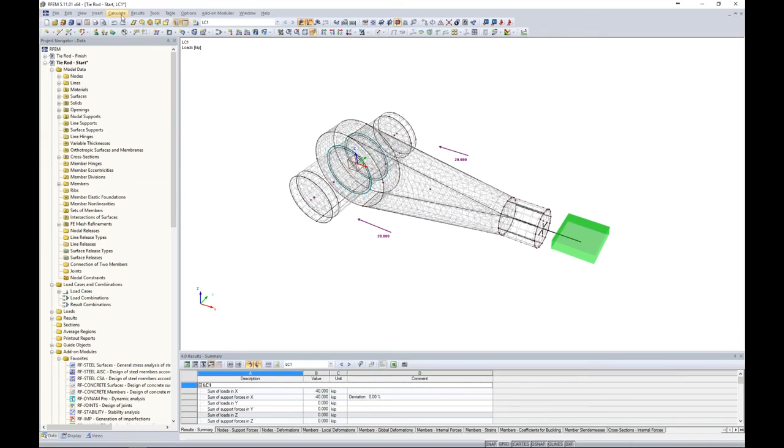We have a load placed on either side to represent tension within that bolt. We want to look at our FE mesh refinements here. Under calculate, FE mesh settings, the global mesh settings are set to 0.03, which is about 0.36 inches. So something very, very small for this type of model.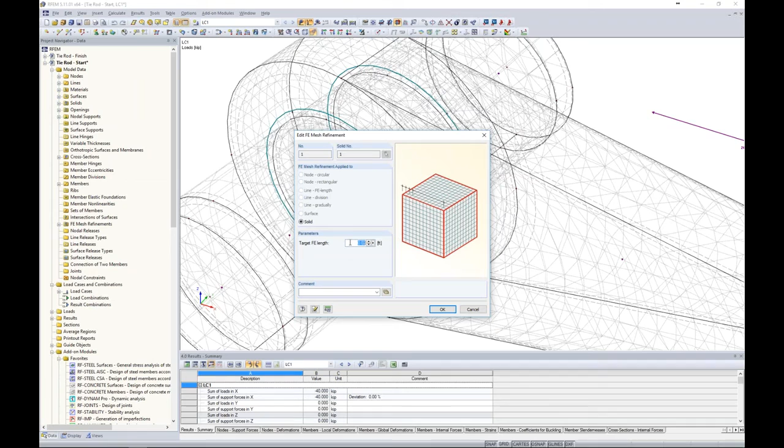You'll notice this cube within the center here. This is another FE mesh refinement, so just like what I pointed out before, we can even apply FE mesh refinements to solids. I set something slightly smaller at 0.02 feet. Then the program will automatically generate this FE mesh and tie everything together so that we manually don't have to worry about any of that.

Now that we've discussed what type of elements are going on here with this tie rod, let me turn this back into a rendered view. We want to run our analysis. In reality, when we run our analysis, we should take a look again at the deformations. That's kind of always my advice, viewing if we're seeing our expected behavior.

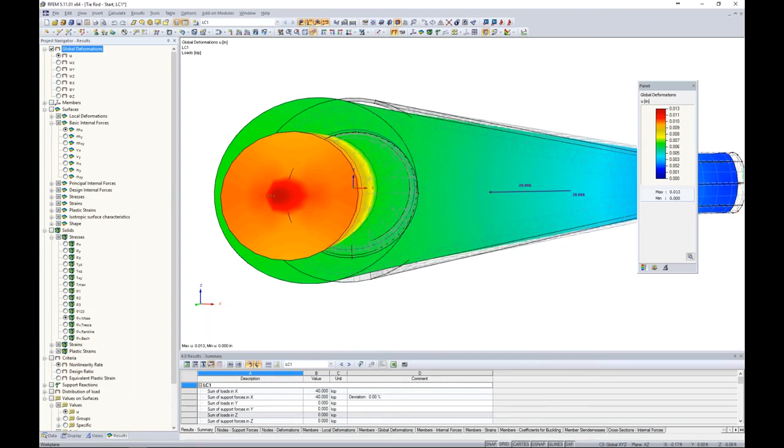So with this bolt element passing through the eye, and we turn this into elevation view and maybe wireframe, we can see that it looks like the bolt is fully fused to the front portion of this ring element. This is not really what's going to happen. In reality, what we would hope is that this bolt would release away from the ring element where we have tension forces, but in the back we would still have full fixity where we have compression, where the bolt's bearing onto the ring.

So how do we exactly take that into account? Let me turn off the results here and go back into a rendered view. I'm going to turn off my FE mesh under my display tab. We can scroll down here to quickly turn that off with a checkbox. So here is all of my input data.

Now, as I mentioned before, every solid element is composed of surface elements on the exterior. So here's a surface element. We can view all of these surfaces available in our data project navigator. All of them are set to null, which means they have no stiffness. They're not playing any importance in terms of the analysis of the program. They're just kind of boundary surfaces for our solid element.

But as I scroll through these, I'll notice surface number 3. Surface 3 is the shared surface between the bolt element and the ring element. So this is where we need to have some influence on the connection between those two solid elements.

Let me create a visibility by the selected objects. I'm going to scroll in here and right click under the surface to turn on the local axis system. Looking at the local axes of this surface, you'll notice I have my local X and Y coordinates, that's translation - left to right, front to back. Then I have my Z coordinate, so keep in mind that that's normal to the face of this surface.

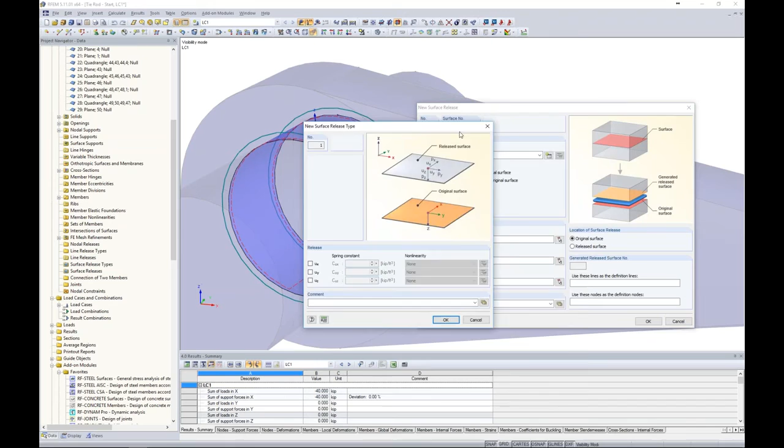I need to define the surface release type by choosing my option over here on the right, and up pops an additional dialog box. Now you'll see my 3 degrees of freedom, translation in the X, Y, and Z. So what I'm going to do is activate all 3 of these. This is my surface release type.

In the local X and local Y directions, I'm actually going to apply a small partial fixity, and that's because we're going to have some resistance of this bolt sliding left and right, front and back. We'll do the same thing for the lowercase y axis. Then we have our local z axis here. And again, sorry, I forgot to reiterate that these are lowercase x, y, and z, not to be confused with global x, y, and z indicated by a capital X, Y, and Z.

So here for the translation direction in the Z component for this surface, I want to set one of these nonlinearities. The option I'm going to choose here is fixed if positive PZ. So when I have any forces that are in the positive direction of this surface, I want there to be full fixity between whatever objects I will soon select, which we'll see in just a minute.

But whenever I have tension forces in between, maybe my bolt and my ring element, I want that release to kick in, and we'll no longer have transmission of any forces in that direction. I click OK. So what is happening here with a surface release? Well, this picture indicates what's going on. This pink surface is actually my surface number 3 here, and the program will internally create an additional surface to apply that generated release surface. It's something internal that's going on within the program.

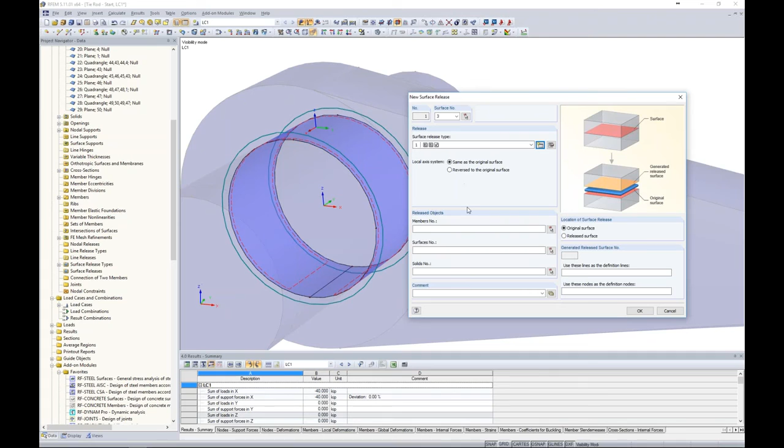Now what we do need to define is a released object. We've defined the release type, but what exactly do we want to release? This is where I'm going to choose my solid elements. We can exit out of this visibility mode, and here I'm going to choose my solid on the left-hand side, which is the left-hand portion of my bolt, as well as the right-hand portion of my bolt. Now there's also a solid within here too, but you can't easily select it graphically, and that's only because we have an additional solid defined for our ring element. So what I can do is click OK.

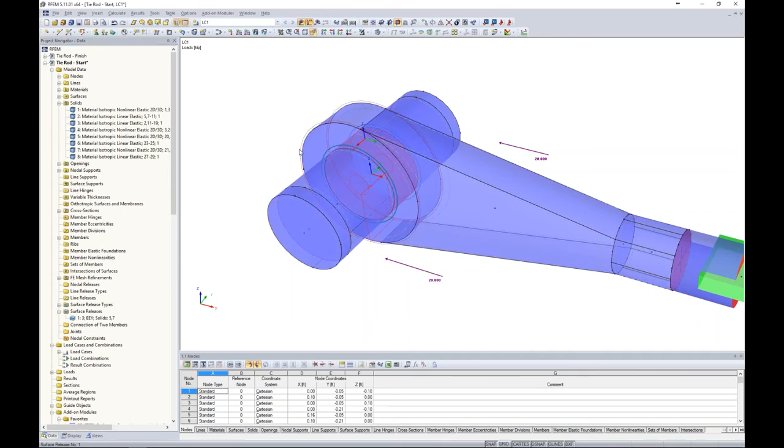I only have solids 5 and 7 defined here. I click OK, and first I'm going to zoom in here, right click to turn off my local axis system. Just like what we saw with our surface elements, we have all of our solids listed here as well. So I can scroll down, and finally I find solid number 4 is the additional solid I would like to release. So what I can do is choose my surface release from my tree here, or you can see a faint dotted line which represents that surface release as well. I double click on it and I can just type in comma 4. I click OK. So now we've applied that surface release, and let's rerun our calculation.

So you can see down here our status. The program is creating all of our FE mesh elements. Again it takes a split second longer, number one because we have quite a few FE elements, not only for our surfaces but we've introduced solids. So throughout the depth of the solid we have FE elements, but we've also introduced a nonlinearity with that surface release. So the program must determine what's tension and what's compression between the bolt and the eye. Once this is done solving, we will see our results presented to us directly in RFEM again. And it's almost done.

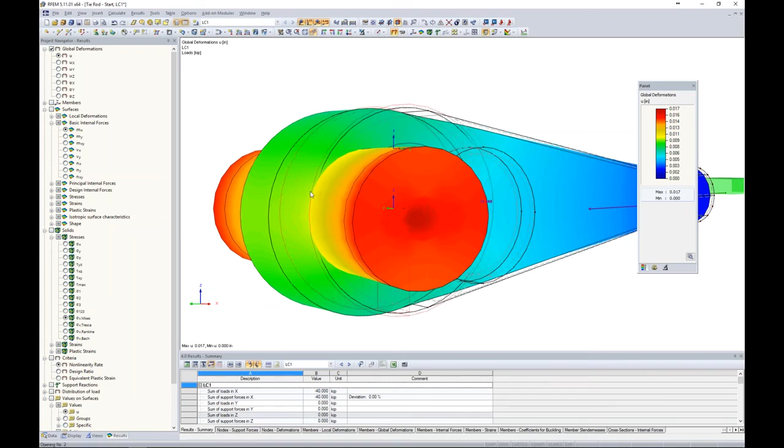Okay, so now we are taking a look at the deflected shape. Again, my recommendation: always jump to that deformation here when our results are presented to us. Let's turn this into a wireframe view, and now we can see much better behavior between that bolt element and the ring of the tension rod. So what we see here is that when we have those tension forces, I actually have a small gap here, but if I rotate it to the back I'll see full compression where that bolt's bearing onto the ring element. It looks like all of those forces are being transmitted.

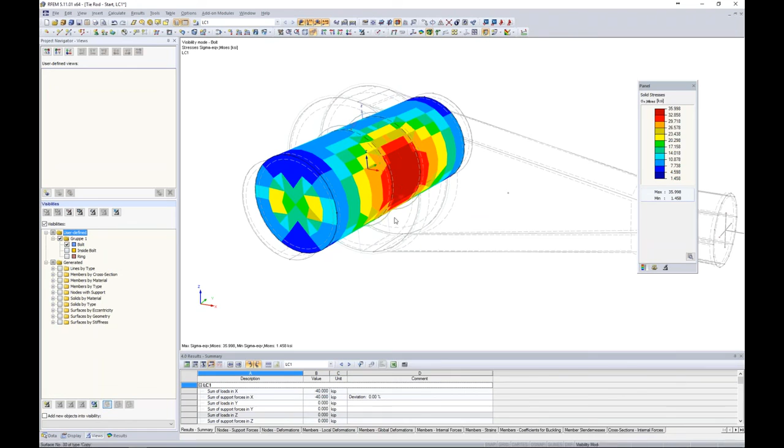Now that's fine for the deflection, but maybe we want to double check everything with our stresses. So for this I'll take a look at my solid elements and in turn my von Mises stresses. Jumping back to my views, I want to activate maybe just my bolt element here. This is going to confirm that we have pretty high tension stresses up here at the front of the bolt, which makes sense based on the deflected shape and the loads that we have applied. If we rotate this to the back, we have much lower stresses where this bolt is bearing onto the eye of our ring here, where that will help with this overall stiffness.

So taking a look at the ring element, same type of concept. When I look up here at the front, I have relatively low stresses, and that's just because I don't have that bolt element bearing on the ring anymore. But at the back side and the top and the bottom, I have much higher stresses where we begin to have contact between those two solid elements.

Now, the other thing to notice is that under the bolt, if we generate this view, maybe we're interested in viewing what our stresses are along the depth and length of this bolt. With solids, it's sometimes hard to tell what's going on externally versus what's going on within the inside of this solid element.

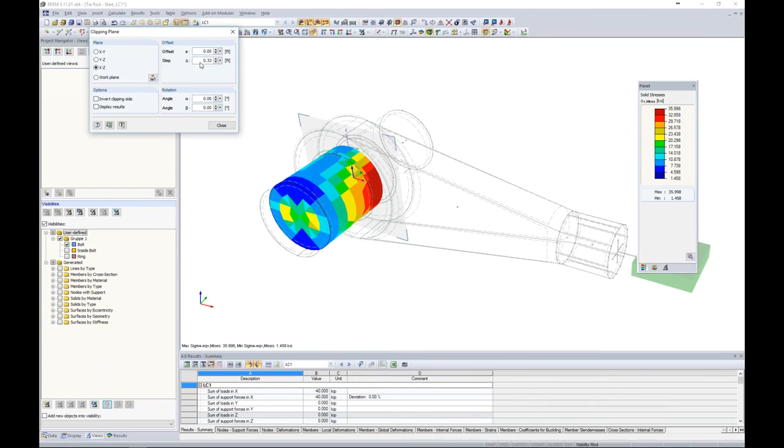That's where we have something called a clipping plane. So under Insert, Clipping Plane, you'll notice that we're immediately slicing this solid element in half, and we can invert the clipping plane so that we're viewing the other side. Here we can set a certain step, something pretty small like 0.05.

Now as I toggle through these eccentricities, I can actually see what's going on within the depth of the bolt element. I'm probably most interested right here in the center where we have the most activity going on with our stresses. So that's something you can easily utilize for either solid or surface elements if you're interested in knowing a little bit more of what's going on internally within these elements.

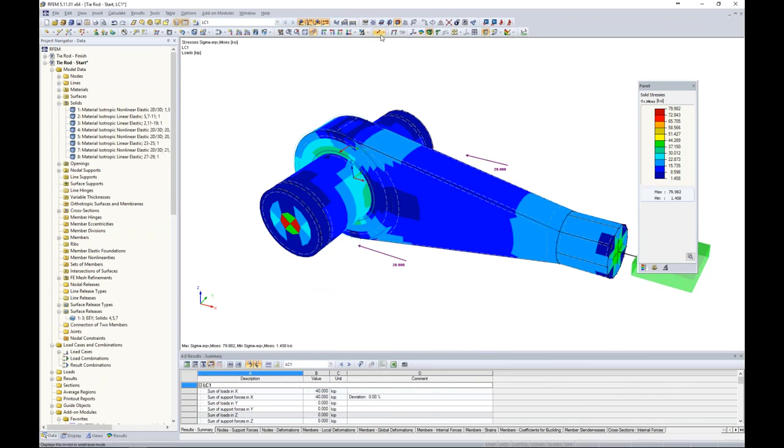One last thing to cover is that you'll notice here that my solid stresses are not exceeding 36 KSI. Well, that would be pretty good luck, but the reason why I did that is because I'm utilizing nonlinear materials within the program. So jumping back to my data tab, let me turn off my results and take a look at the rendered view.

My materials are listed here of what I'm using within the particular model. The first one is steel A36, which is the front portion of this model as well as the two end solids for my bolt. When I double click on this, you'll notice the material model is set to isotropic linear elastic. So any linear elastic material is already included within RFEM, which is fine for this front portion of the model.

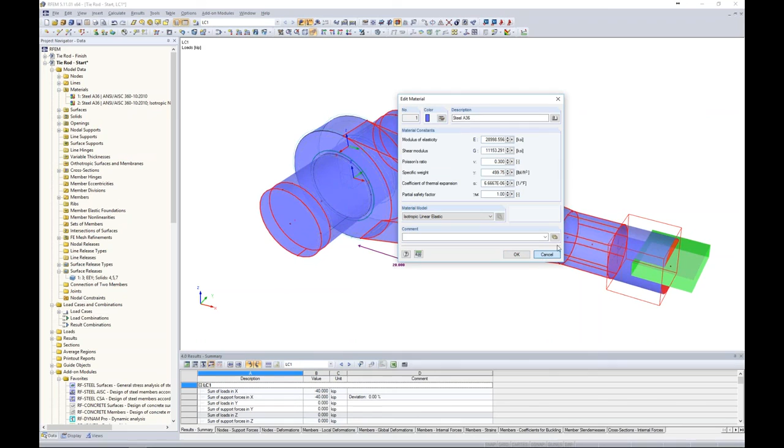Now, as far as the rear portion of the model, where I'm most interested in this connection, I double click on the material and you'll notice that I changed the material model to isotropic nonlinear elastic. So any nonlinear elastic, plastic, and so forth is where that add-on module RF Mat NL comes into play. That will release all of these various options to do a nonlinear material analysis.

For example, you can see here in our details, which if this opens up—I don't know why there's a little bit of a lag time, it must be the FE elements—we can see here the yield strength is set to 36 KSI, more or less just from our steel A36 material.

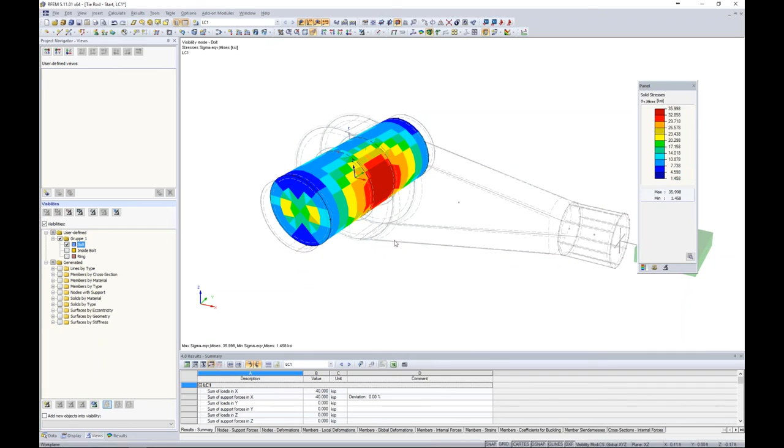So now when we take a look at the model and we ran our analysis, which is what we just saw, we can turn back on our results and take a look at maybe our view of just our bolt. Again, nothing is going to be above this 36 KSI. What's happening is the load is being distributed on these FE elements. The minute that FE element reaches the yield strength, the load will be distributed to adjacent elements until that's a fully complete process.

That's something that I get a little bit more into with the other recorded webinar on our YouTube channel. So if you are interested in that, you can find it there, or send me an email and I can point you to the right direction.

Okay, so that concludes the webinar for today. I know that was quite a bit of information, but keep in mind, almost everything entirely that you saw today is just our main program RFEM without touching any of our add-on modules.